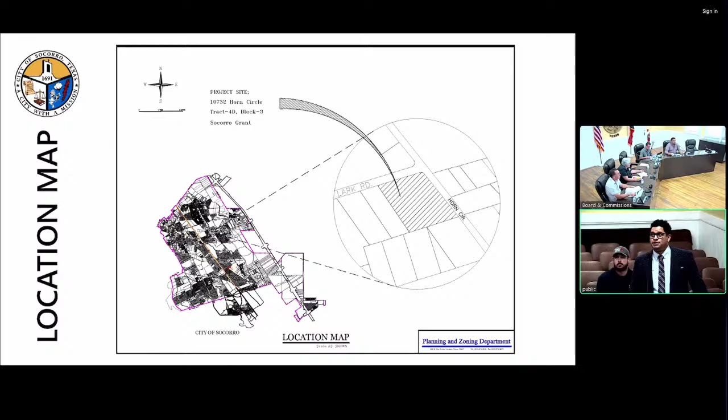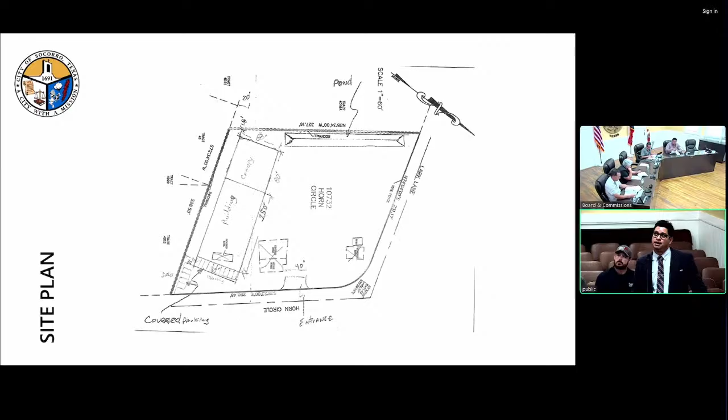Followed by the site plan showing what the intent is, which is to allow the fabrication shop. You can see the parking area and a very preliminary ponding area at the very top. Once again, the request is for approval of a rezoning of a property from R1 to C2 with a conditional use permit to allow for a fabrication shop and a variance request. At this time, staff can answer any questions. We have also Mr. Aranda present to answer any questions as well.

I don't have any questions. I'd like to see this map again.

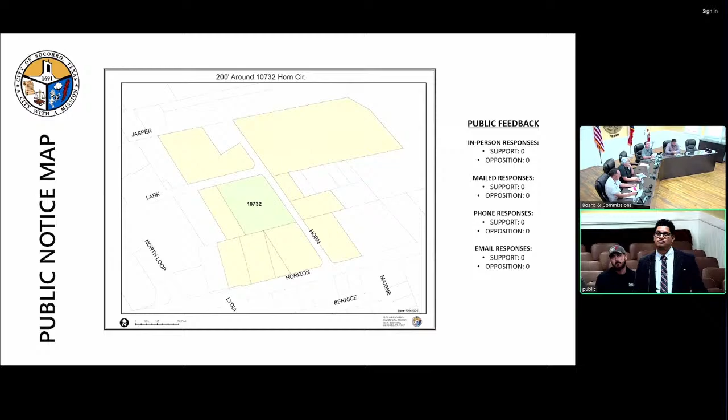I know on that slide you probably can't, but can you see the whole neighborhood of what's in there right now? The whole subdivision? No, this is just that one. You're wanting to zoom out to look at the larger area - these are static maps. We could look at a Google Earth if you wanted, or our planning and zoning map, if you wanted to reference something within the zoning or the larger area.

Yeah, I'd like to see what that subdivision is. It isn't a developing subdivision, it's unplatted, right? It's an unplatted lot. Correct, it's still in tract form - that parcel is unplatted.

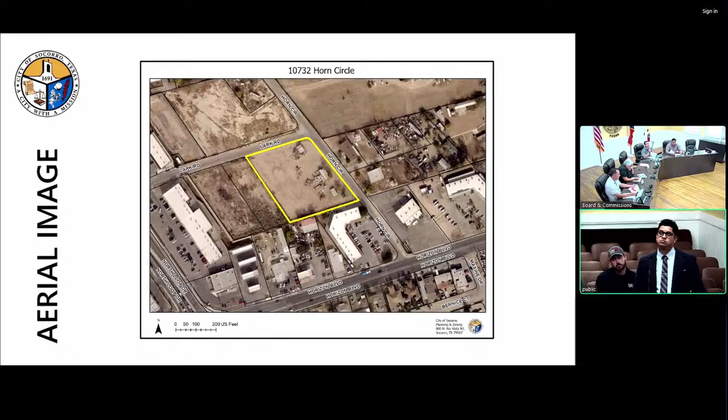But I'm not familiar with the area. I'm wanting to see that whole section aerial and see what's out there. How many single families are out there? Are there any other C2 zoning in this area?

It's because we're seeing just like a cross section of that subdivision, right? And it's like a big corner or a big section of that neighborhood, North Loop and Horizon. Yeah, that's a lot bigger area right there.

So where's the lot at? That's the lot, yes. Weren't there some apartments that came up on Horn? Are those completed already? I believe so, they're close.

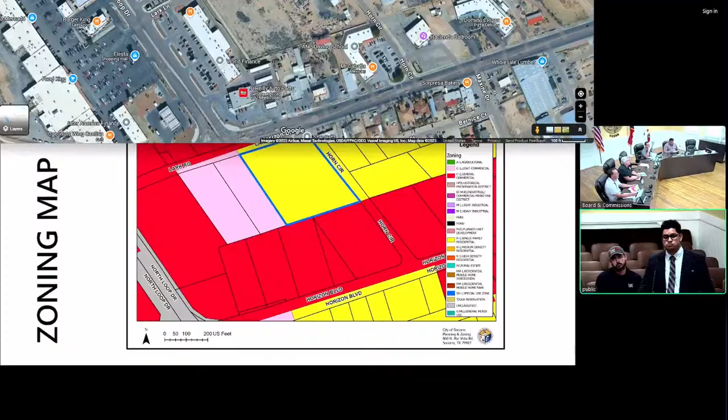And so the future land use map, it says it was rural residential? From what year was that map? 2024 - that is our most recent plan that was approved in July of 2024.

Any questions? I have a question. So it looks like the owner of the property has been operating some kind of commercial business there already. Are we just trying to make it right and go to a commercial zone? Because it does look like he has some kind of commercial business already, is that right? Yes, that's correct. So he has actually been operating as a commercial business for all these years, and I think now he's just trying to make it right? That's correct.

And that was my question - did he get cited on anything? Yes, I believe there was a notice of violation issued for the work on the property, which is currently zoned R1. What is he using it as right now? What is he doing, what is he fabricating? I believe they're fabricating - is the applicant here?

Can you speak to the applicant, please? If you want to pass. If I could just - speak a little louder. Okay, what's the commercial thing? What are we doing now? Can you state your name, sir, please?

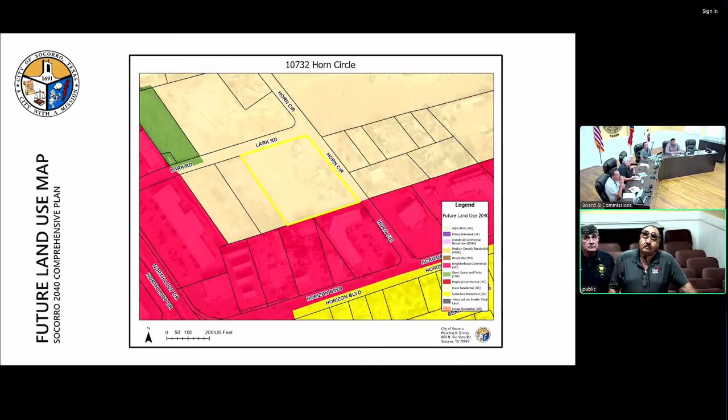And pay the taxes as commercial, because all the red you see, that's commercial. Yes, okay. And so we've been fined, we paid everything in full, we just want to get everything done correctly and enrolled, because we're getting a loan from the bank to tear everything down - like my dad said, tear it down, build new, level it, do the ponding, a new building, fence all around 360 degrees, just do it right so we could continue working, because we're building apartments on East Lake, we just fabricate there and then we go install. We don't sell retail, we don't sell to customers - there's no customers coming in, we just have our set customers that we do work for, so we fabricate and then we just go install.

We fabricate laser cut panels, like decorative panels for apartments, anything metal. Everything will be done inside our future building.

If this gets approved, the bank will release the funds so we can start construction. We make automotive parts too, but everything is done with the CNC plasma indoors. We fabricate and then go install, that's all we do. We don't keep anything, the only material we keep is what we're using for that project.

Are you guys familiar with that area? I've gone by there several times, we take shortcuts through there sometimes. It's a mess right now, everybody shortcuts there, so I think it's good faith for you to come and say you want to bring it up to commercial property. Everything around there is commercial pretty much, they have a tire shop down the street, a yard with 18-wheelers parked, and they're currently selling the 2.5 acres that are going to get rezoned for commercial as well. You've got Gandaras recycling down the street off that close street too, so everything there is pretty much commercial already.

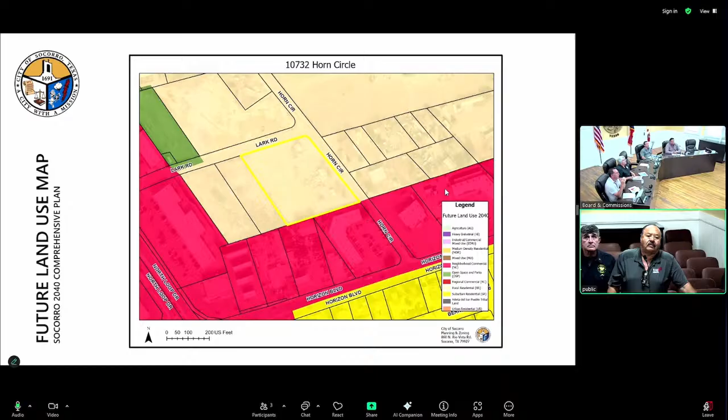Do you have the overlay showing the zoning for that subdivision right now? The zoning areas, all the red is commercial - well, that's the future land use map. The planning and zoning page has the zoning map that will allow you to zoom in and out.

It does look like there are empty properties around your section. Yes, to the right, the one in pink that's commercial, then the one in red across from us that's commercial, and all the way around. The yellow is R1 right now. Actually the one in pink is lighter commercial.

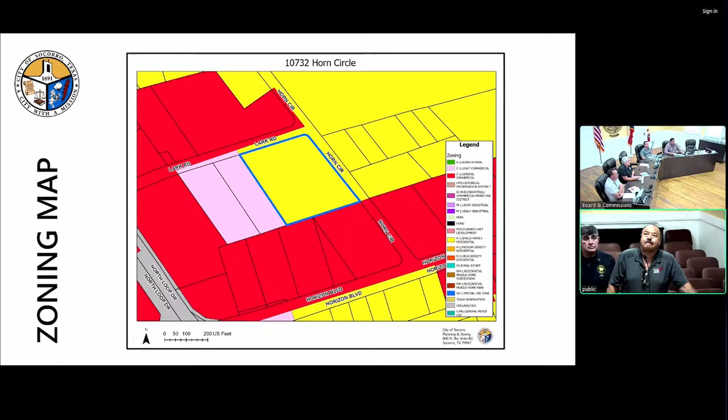So anything that's higher than what we're asking for - we just want to be C2, normal commercial. No, the pink is C1, which is less intense. But across from you on Horn, a little farther down, is an M1, which is more intense than C2.

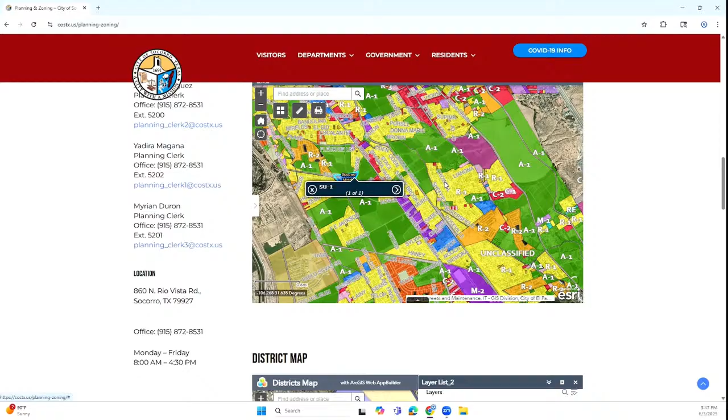Okay, so what I'm seeing - point out Horizon and North Loop for me please, just to make sure. That's Horizon and North Loop. Okay, and so that C2 on the upper left, that's the furthest corner, catty corner the other way, where Horn turns onto Circle, North Loop, on the bottom end - so that whole area is empty.

And I see where the applicant's lot is at, and we've got M2, C2, A1, R2, C - everything in red, which is C2, up along the major highway, the major streets. But everything in there is just, how do you say it, a hodgepodge, you know what I'm saying.

So I'm wondering how many - I know there's still some single families in there, right? I'm just seeing, from our perspective, I personally like the rustic rural feel, because that's what it used to be many years ago, but now we've got all commercial.

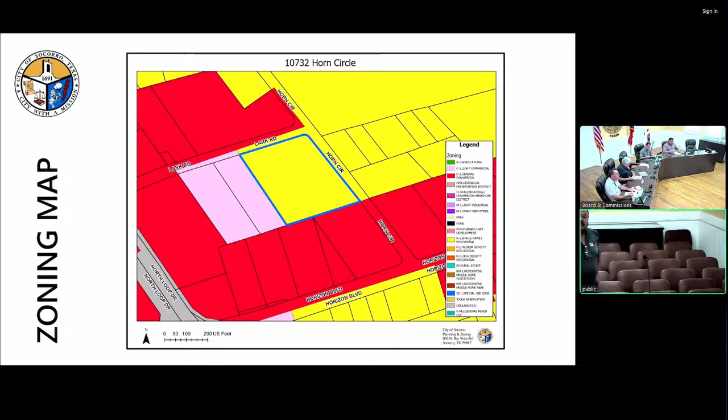Questions? No? So I'd like to make a motion to approve the zoning request with the conditional use permit and the variance request also. I'll second. I have a motion made by Andrew Arroyo, seconded by Osvaldo Reza, to approve. All those in favor of the motion? Aye. Any nays? Any abstain? Motion carried.

Item number 7, public hearing on the proposed amendments to the City of Socorro's master plan and rezoning of Lot 5, Block 8, Mary Lou Park subdivision, located at 636 Maxine Drive, Socorro, Texas, from R1 Single Family Residential to R2 Medium Density Residential to allow for a duplex.

Mr. Arroyos? Good afternoon, we will open the public hearing at 5:52. We have anybody that would like to speak? We don't have any speakers, so we will close at 5:52.

Thank you. Item number 8, consider and take action on the approval of the proposed amendment to the City of Socorro's master plan and rezoning of Lot 5, Block 8, Mary Lou Park subdivision, located at 636 Maxine Drive, Socorro, Texas, from R1 Single Family Residential to R2 Medium Density Residential to allow for a duplex. Mr. Botello? Good evening, Mr. Chair and Commissioners. Item number 8 on the agenda is the rezoning request at 636 Maxine Drive.

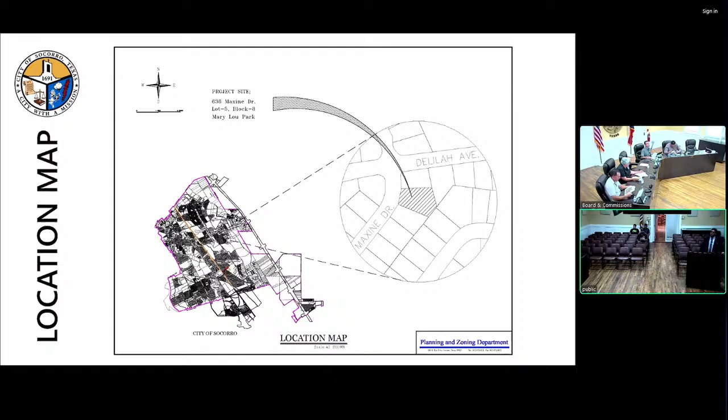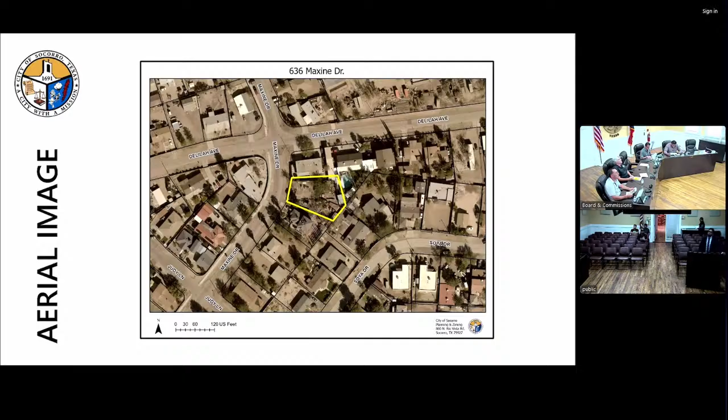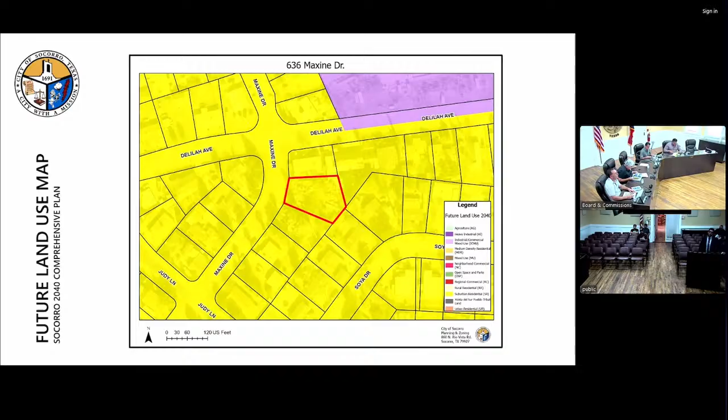This is a future land use map. The yellow overlay would be the suburban residential zoning under the Socorro 2040 Comprehensive Plan.

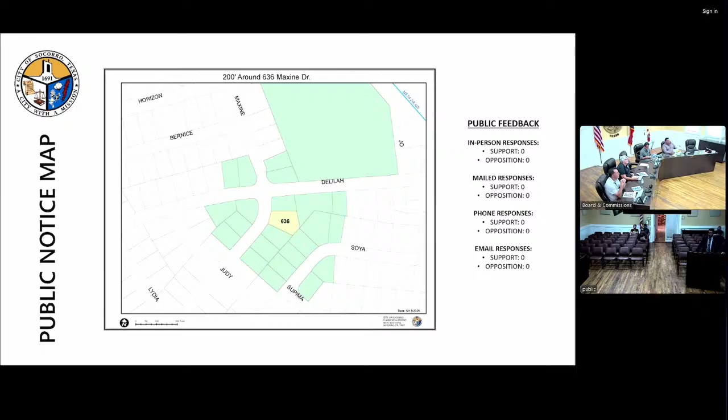The public was notified for this rezoning request, and staff did not receive any correspondence in favor or in opposition for this rezoning request. Followed by the public notice letters, both in English and Spanish.

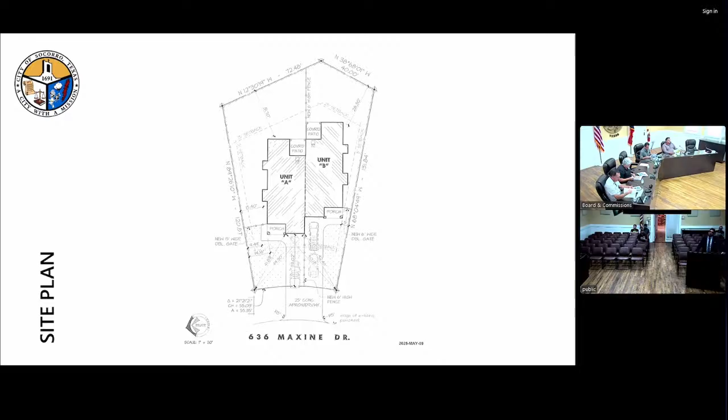This is the site plan that was presented showing the units, followed by a supplemental document showing more or less the square footage and the layout for each unit. Once again, the summary is for approval of the rezoning of a property from R1 to R2 to allow for a duplex. At this time, staff can answer any questions.

So the property next door is already in R2? Yes, ma'am.

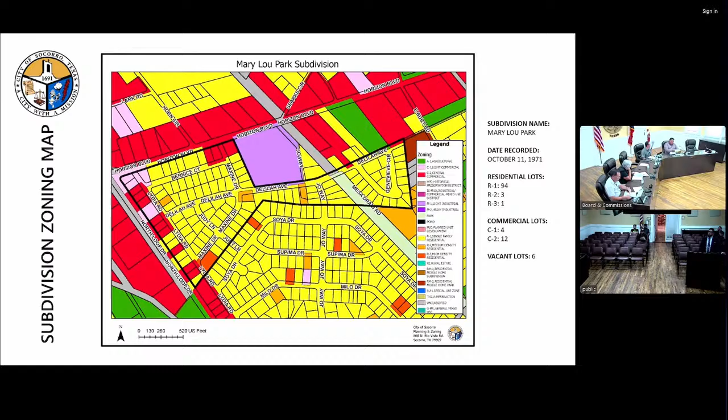I don't have any questions, Mr. Besa. Nobody's opposed to it, right? No. Okay, I'm good, I don't have any questions.

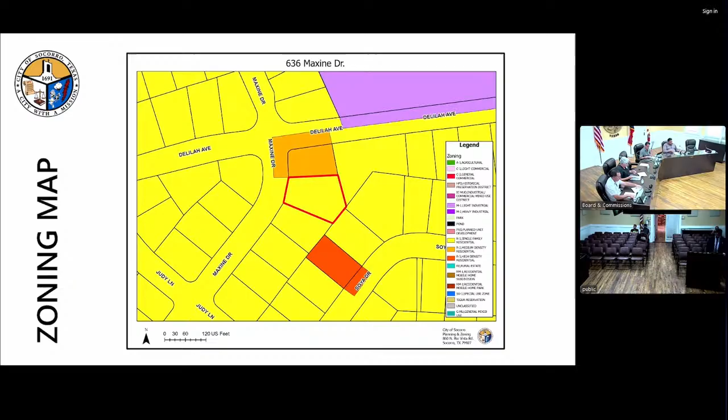I'd like to make a motion to approve. I second. I have a motion made by Andrew Arroyo, second by Yolanda Rodriguez to approve. All those in favor of the motion? Aye. Aye. Any nays? Any abstain?

Motion carried. Item number 9, public hearing on the proposed amendment to the City of Socorro's master plan and rezoning of Tract 10I, Block 3, Socorro Grant, located at the intersection of East Burt Road and Range War Court, Socorro, Texas, from R1 Single Family Residential to R2 Medium Density Residential to allow for the development of single family residential lots on a vacant undeveloped property.

Mr. Arroyos? Good afternoon. We will open public hearing at 5:58. We have no speakers, so we will close public hearing at 5:58.

Thank you. Item number 10, consider and take action on the approval of the proposed amendment to the City of Socorro's master plan and rezoning of Tract 10I, Block 3, Socorro Grant, located at intersection of East Burt Road and Range War Court, Socorro, Texas, from R1 Single Family Residential to R2 Medium Density Residential to allow for the development of single family residential lots on a vacant undeveloped property.

Mr. Botello? Good evening, Mr. Chair and Commissioners. I'd like to tell everybody that I will be abstaining from this item, just because I don't work for that company, but I work with the owners related to that company.

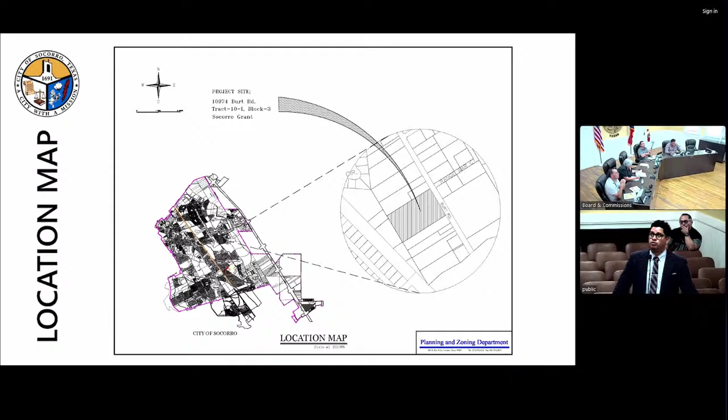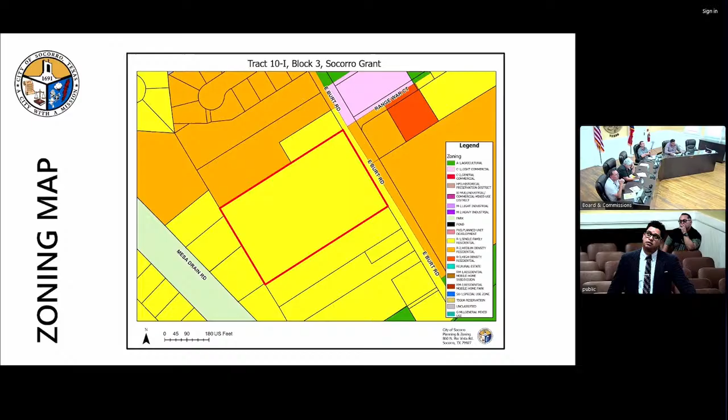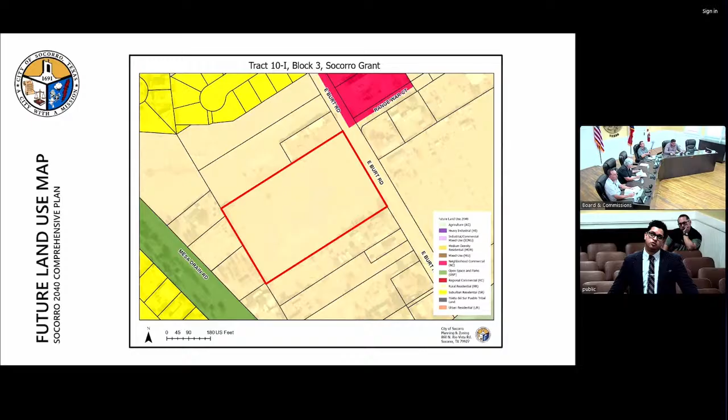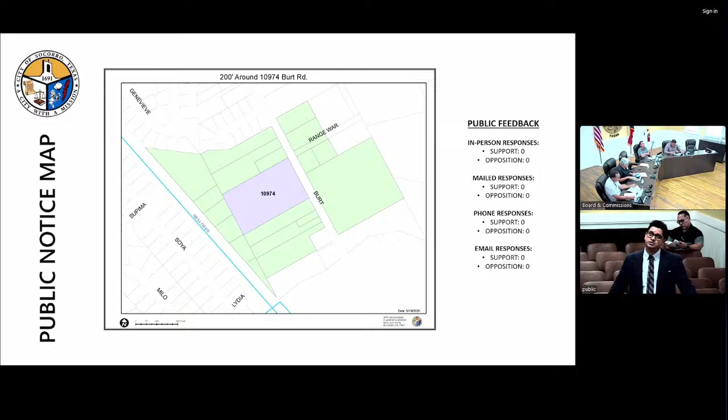Constituents within 200 feet of this property were notified for this rezoning request. We did not receive any correspondence either in opposition or in support of this rezoning request, followed by the letters both in English and Spanish, notifying the constituents for this public hearing.

At this time, staff can answer any questions. We also have Mr. Escarate present to answer any questions as well.

I know we've seen another one on here recently, but what's the width of Burt Road? Like the right of way for Burt Road, more or less? That would be more or less 55 feet.

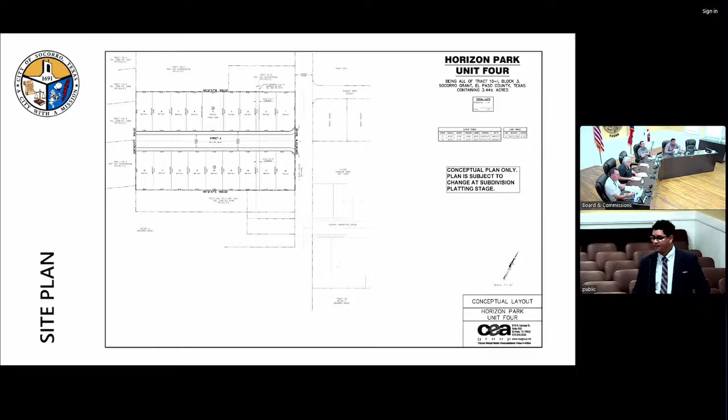The applicant is here, can we ask some questions for the applicant? Good afternoon, Commissioners, Jorge Escarate with CEA Group for the record. Commissioner, to answer your question, we are proposing a 60-foot right-of-way with a 40-foot paved roadway from curb to curb, so it's in line with the City of Socorro standards.

We had looked at another subdivision earlier, and the next item is 5 acres across it, right? So all of those will be connected to Burt Road? Correct. They're not connected to any other subdivisions or anything like that? Correct, this is all through Burt Road. The other one across it does have a connection to Horizon Park Unit 1, Replat A, for the apartments, that also provides access through Francisco Vaquera to Horizon Boulevard as well.

And all services, like utilities, are they already on Burt Road? I imagine so, there's utilities on Burt Road, and actually, as part of this development, we're going to be extending water and sewer to some of our neighbors abutting it. Right now they are currently landlocked, the property to the west of us, landlocked and have no services. Now we're going to bring up a paved roadway that they're going to have access to, so they can come in and out of their property, and we're going to extend service to the property line, water and sewer, and then just end it there, and then they can go ahead and extend it if they need to.

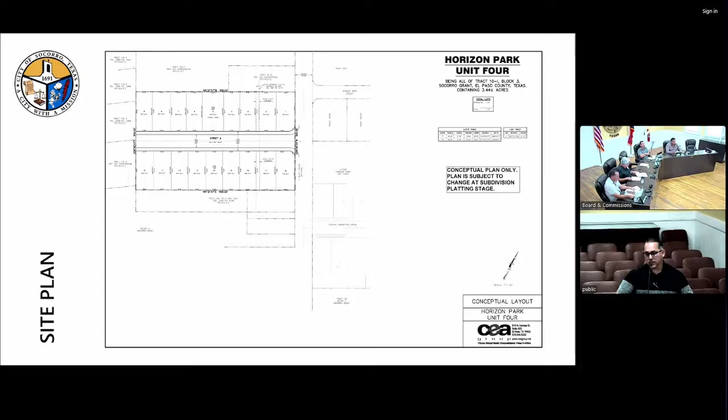I don't have any questions. Make a motion to approve. I'll second. I have a motion made by David Estrada, seconded by Osvaldo Reza, to approve. All those in favor of the motion? Aye. Any nays? Anyone abstain? Abstain. Motion carried. Thank you.

Item number 11, Planning and Zoning Commissioners Report. Isn't there another item missing? There's item number 11. I'm so sorry, I do apologize about that.

Consider and take action on the approval of the proposed final plat for Horizon Park Unit 3 subdivision, being tract 10-J, Block 3, Socorro Grant, located at 10971 East Burt Road, Socorro, Texas. Mr. Botello, again, I'd just like to advise everybody that I'm going to be abstaining from this one as well, for the same reasons.

Good evening, Commissioners. Item number 11 on the agenda is the Horizon Park Unit 3 final plat. Some general information on this request: the property owner is Bowling Brothers Development Company LLC, and the representative is Mr. Enrique Escobar. The size of the property is 5.165 acres, currently zoned R2, medium-density residential, with current land use being residential and agricultural. The summary is for approval of a final plat for Horizon Park Unit 3 subdivision, and staff is recommending approval.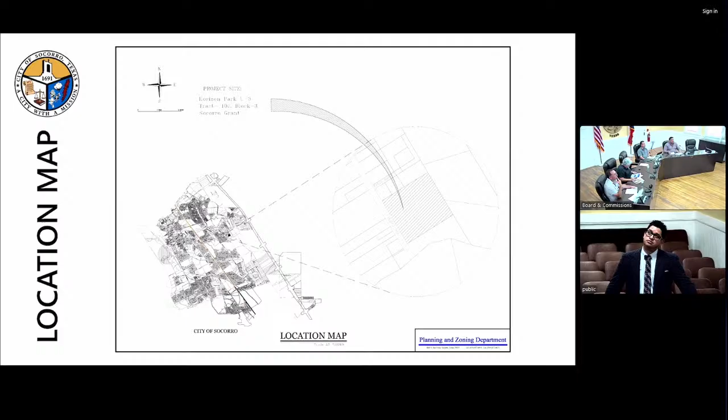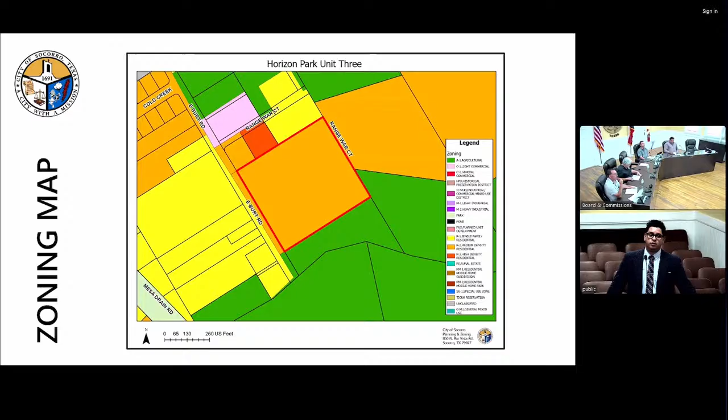On the next slide, you'll see that the property is situated along Burt Road, within close vicinity to Horizon Boulevard. The following slide shows the property outlined in a thick red line, with orange denoting the R2 medium density residential zoning district. This is a view of the property from East Burt Road, followed by an aerial image, and then the final plat showing the connection through Sophia Arroyo's Drive, connecting this subdivision to Horizon Park Unit 1 Replat A.

Once again, the summary of this request is for approval of a final plat for Horizon Park Unit 3 subdivision. At this time, staff can answer any questions. We also have Mr. Azcarate present to answer any questions as well.

I have a question about the streets. So how many lots are on this subdivision? It's similar in size, about the same, right? Yes sir. It's hard to see, 17. 17 on this one and 18 on the other one. Yes sir, correct, 17 - one of them is a pond on the other one. Yeah, they look almost the same.

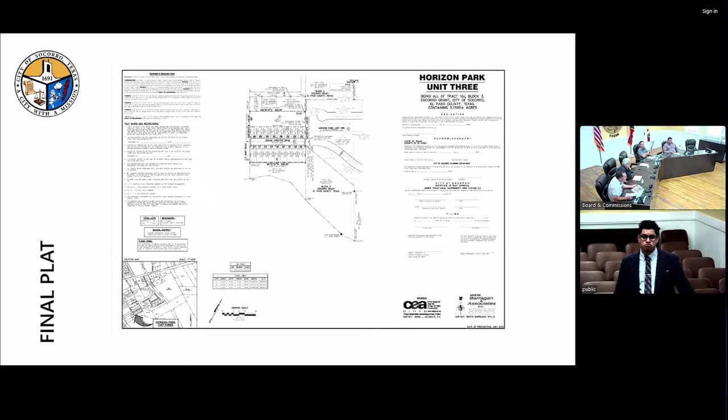Motion to approve. I'll second. I have a motion made by David Estrada, seconded by Osvaldo Reza, to approve. All those in favor of the motion? Aye. Any nays? Any abstain? Abstain.

Motion carried. Item number 12, Planning and Zoning Commissioners Report.

I don't have anything. Teresa? Estrada? Aye. It feels good to be back for a while, work just got into me.

The only other thing I will say, throughout the city - great job on that Bovee Bridge. But if we can request the speed humps to be painted. I mentioned it a couple months back, in all subdivisions, because in Haciendas del Valle they're not painted. What's that other one, Villas del Este, and the Bovee one. I say it because of the school, since we have Socorro Elementary there. I know they put the speed radars, but at night people jump those speed humps. So in those two areas, if we can get them painted, that'd be great, because you can't see them. They just put a new sign in front of the school and it's already knocked down when you try to go around it, so that would be great, please.

I would like a high-tech sign that shuts your engine off if you're going past 40 miles an hour, just going down Horizon. It is horrible, it is bad. I know there's a lot of good stuff going on with the city, a lot of improvements. I think we're trying to keep up with the other side of the I-10, but we're almost there, I think. We just need a lot more entertainment instead of a lot of warehouses, and I think you see it all over the place.

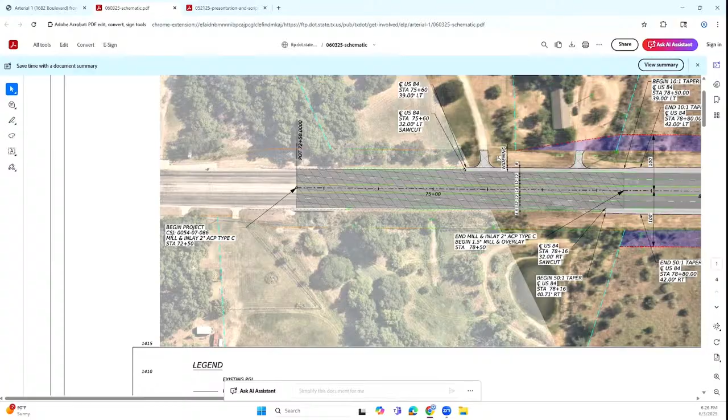But we are at this point now, and still in the public comment period. All of the information that anybody can provide, in favor of or against, is encouraged. If anybody has questions, you can direct them to our office and they can speak to me. And the extension of that comment period is so that the residents can go in and comment.

Yes. What benefit does it do to them? That they're gonna get heard? Yes, is that gonna change course, the route? That they can get heard, that they can present their information, that they can present information that maybe staff or the consultants are not aware of. All of this gets taken into consideration.

Unfortunately, we are in a very tough position. If we want to build roads, if we want to extend our networks and provide connectivity and make it easier to navigate our vehicles in and around Socorro, we're going to have to build roads. And there's nowhere really in Socorro where you're not going to impact somebody either directly or indirectly.

It would be great if you could anticipate and have the resources to make these decisions, to put the roads in before the development. But these larger projects, cities, municipalities don't have those types of resources.

But we are trying to address these issues as best we can moving forward. There are things that can be done to help mitigate the negative aspects of any project, and those can be looked at as well. But yes, it's important for everyone to voice their opinion, to have their opinion noted. And the earlier in the process, the better.

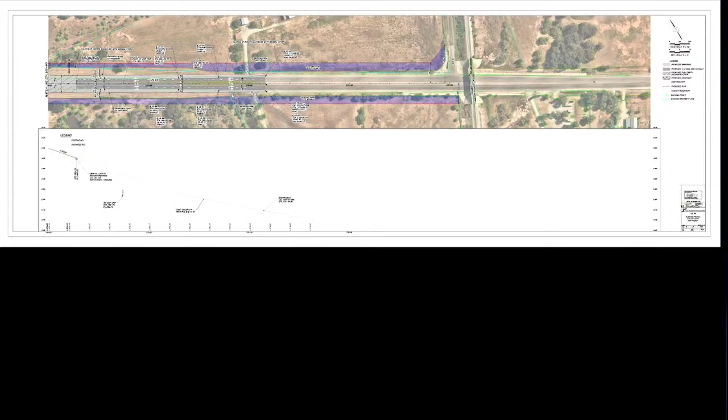I lost my train of thought. What was your question again? The other one was, they're saying they're gonna buy our land, eminent domain, right? So in this whole long process, it's narrowing it down to where are we putting this road, is this environmentally cleared to design it. This is going to be the route, these are the impacts, this is how we can mitigate the negative impacts, and this is where we're going to move forward.

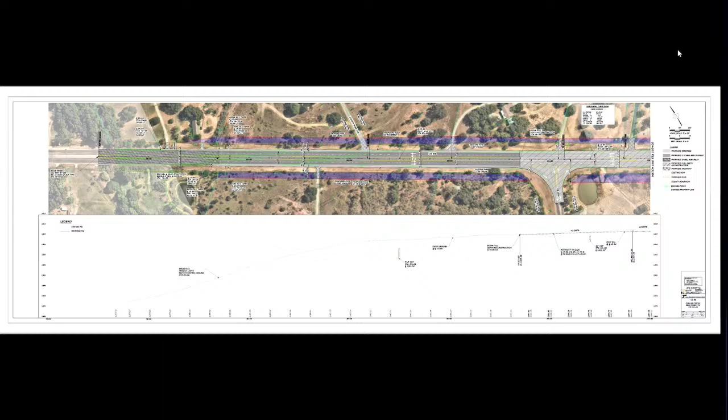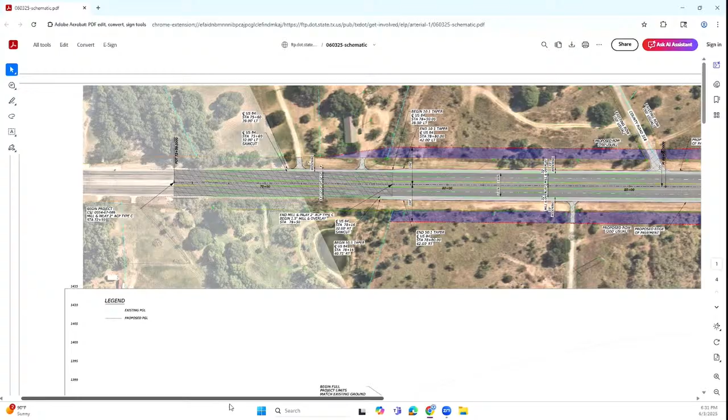Now, the next phase is the actual schematics and drawings and designs, clearing the environmental, and then going into the next step of right-of-way acquisition. If there are properties that are impacted, what level of impact are we talking about -- hey, we need 10 feet of your front property, or we're going to take more than a certain amount? Then negotiations happen, whether it's 10 feet or a whole property. That's the next step of negotiating. And because this is federal funding, we have a process that we need to follow, a uniform act, overseen by TxDOT, so that everything is fair and equitable.

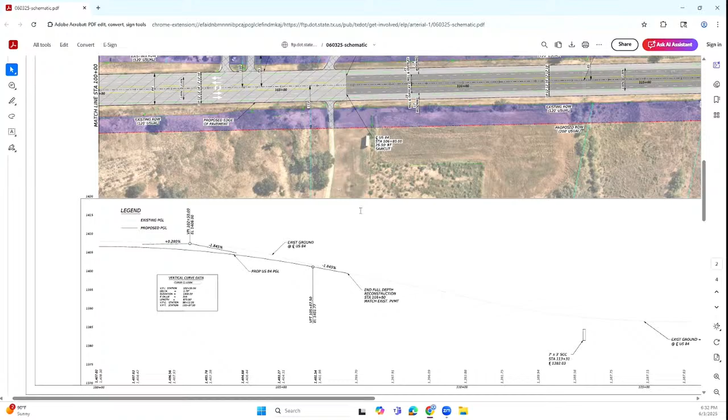And so where is it supposed to come out on the other side of Alameda? You have to cross at one end and then make our way through. Do you want to start, go to the far right on this?

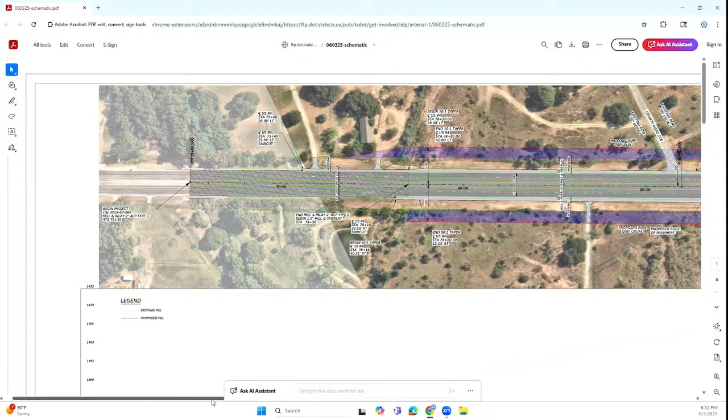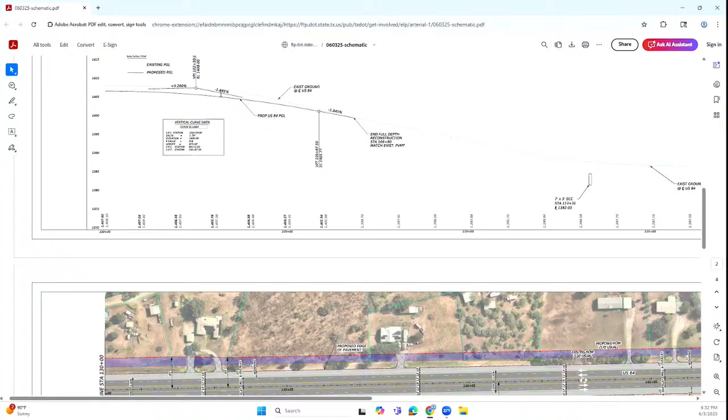It doesn't look like that's the right road. Yeah, I think they have the wrong map up, doesn't look familiar at all. Okay, we'll reach out to TxDOT to fix that. It says US 84 -- no, wait, what does it say?

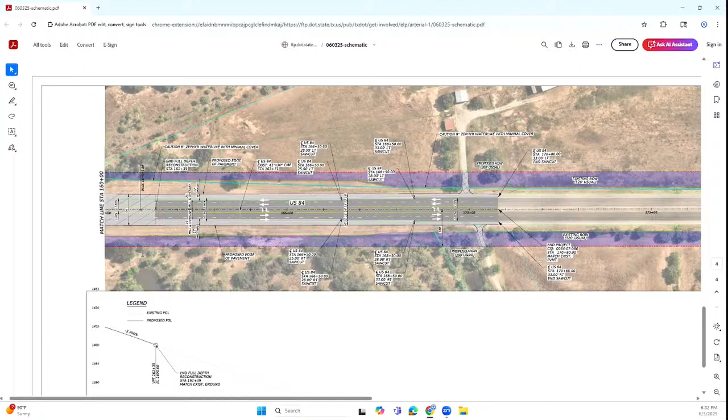I have another question. About a month ago, or maybe more, we had an applicant here that was going to -- the road on Bauman was gonna go up to I-10. It was a rezoning on North Loop, to commercial from A1. And this rezoning was their first phase, and they own pretty much all of the land going up between North Loop and I-10 and the city limits. There's a stretch that's outside of their ownership and extends out to the county. So that is that individual developer's plan for that. It does not involve federal funding or state funding. It's an alignment that somebody is trying to make for that development.

But ultimately, they would like to be able to provide that commercial development on North Loop, build their residential development, and have access up to the gateway. But that's privately owned, not federally funded.

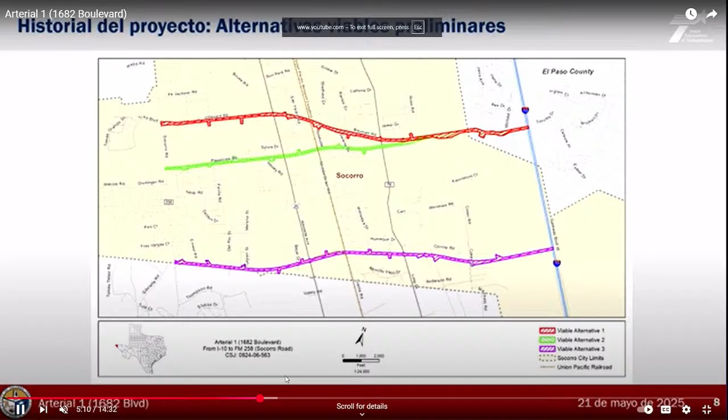I was going to add this since you had a question on condemnation. I've done it twice with the city, on Nueva Tanks Road and maybe Fray Alguin Road. It depends on who owns the road. Once you start doing the title paperwork, sometimes the owner only owns a little piece of the road, or sometimes it's been open to the public so long that the city actually owns it, even though there's nothing on title.

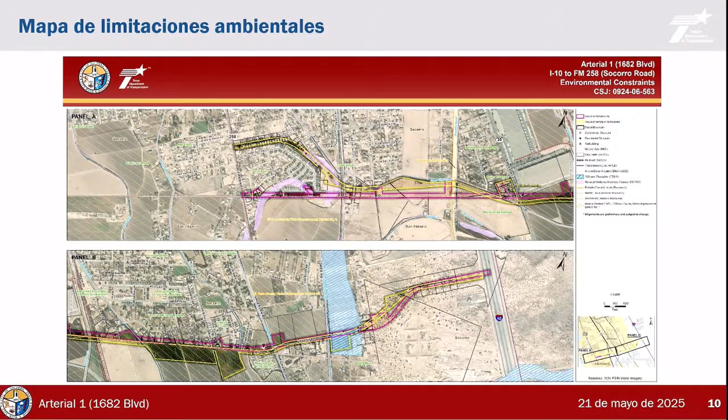So if they need portions of the road, you have to negotiate with each owner. On Nueva Tanks Road, that process took about 2 to 3 years, because everything had to go through TxDOT forms. We'd run it by TxDOT, get their approval, then send out offers. Most everybody negotiated, some just gave the land, but they all wanted something in exchange.

One guy wanted a traffic light agreement, another wanted a curb cut in the middle of the road so people could turn. Every single person we had to negotiate with. Then you don't just need the road, but easements on both sides for utilities, so people were negotiating that too, and we had to send multiple offers for the land and the easements.

On that one, the electric lines used to be on the other side of the road, so we had to work with the electric company to move all the poles and put in newer metal ones. There was a lot of give and take, and it depends on whether people will be easy or not.

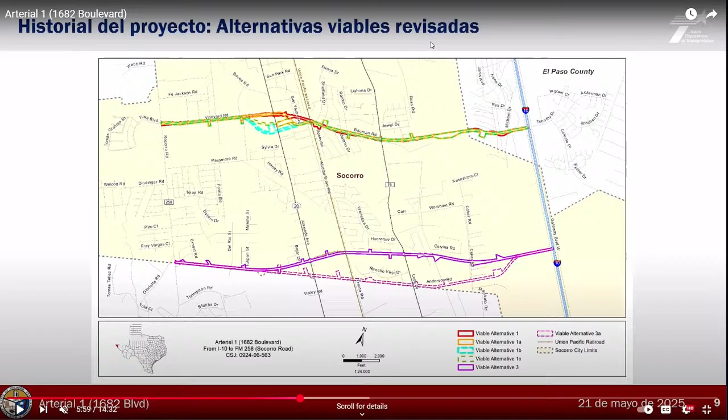A lot of times residents say, oh yeah, we want the road and this access, but once you start condemning their property they say hold on, not mine though, or I want top dollar, or I'll take the city to court and we'll fight it out for months. It depends on those people. Ultimately the city has a right through eminent domain to use roads and create rights of way, but it depends on how many owners you're dealing with—that one had maybe 13 or 14 owners.

EPCC was one of the people we were dealing with, along with the Lower Valley Water District. Then there are crossings you have to deal with, doing a lease agreement. That whole process took 3 years out of the 10 it actually took.

On the Arterial 1 project, I remember going to a meeting, maybe in 2019, with TxDOT and Adriana Rodarte. It was the very first meeting, so it's been 5 to 6 years, well before COVID.

I took a ride out there yesterday since I wasn't familiar with the area, because of all the Facebook stuff—friends were calling asking what's going on. It kind of blindsided me since I didn't know anything about it, but I did take a ride out there, and there's a lot of vacant land.

I don't believe they're going to take a straight cut right through, because there are some really nice ranch homes out there. The roads are bad—it looks like they're putting in sewer lines, and there's a lot of road work in some areas, but the pavement on those streets is terrible. You don't have two ways to go. I also noticed a warehouse way up at the very top edge.

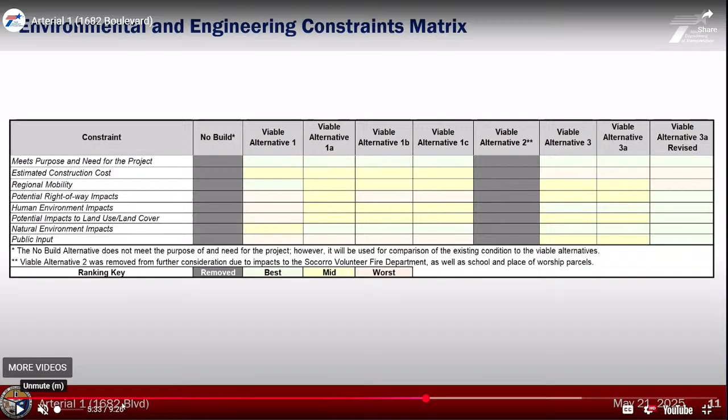Okay, that's clear. So we're kind of confused, have we taken into account all that future traffic, is it going to hit Socorro Road, and it's one lane going and coming? But it's going to go out onto the freeway, the new Loop. A lot of the traffic from Socorro Road will head up to I-10, so some of that traffic that would go through Socorro Road will divert right and go up toward the freeway. So it should slow down.

Mind you, they'll get to the interstate and have to go down and around if they're going east, but if you're going west they can. But if you're coming down the arterial and going down to Socorro Road, all the traffic from I-10 is not going to hit and buckle up at Socorro Road if they're going either right or left, because you only have one lane going and coming.

So are there future plans to extend that road, Socorro Road? I don't see that, because of the historic nature of the corridor, the Mission Trail. It's going to come out right here, this vacant lot.

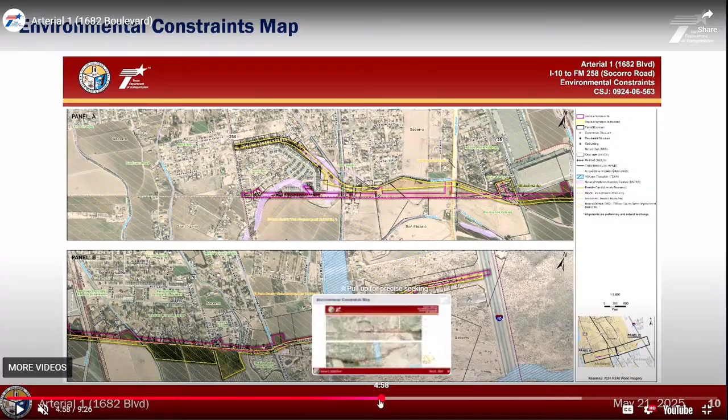It was three initially. The first two, alternative 1 and 2, started at the same point on I-10, made it through to North Loop, and then diverged there. The third was a southern route that was straight across, more or less, from that point on the interstate to Socorro Road. After revisiting this, I want to say that was the April meeting, there were about three other alternatives looked at for that southern portion, and that eliminated the initial second option.

So I think that was about variations of the three options. And so now they're looking at this, which is called arterial 1. This is still arterial 1.

The lead is Socorro, in partnership and in conjunction with, managing it with TxDOT. And there's a consulting company involved, or is TxDOT running all the consulting? No, the city is the lead.

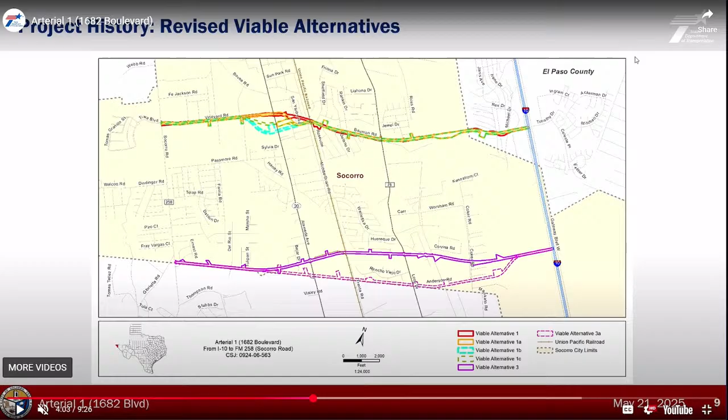We went through the process of bidding for our engineers and who would be the engineering lead on our project. So they also have under them a team of people who are assisting with the outreach and gathering all of the data, putting together the documents. So CEA Engineering is the firm that oversees, along with us, this project.

At the leading, the City of Socorro is the lead agency, and then we're just coordinating with our partners. There are some aspects that need to be coordinated through the El Paso Metropolitan Planning Organization, because they allocate funding in the region as the transportation planning agency. And then there's TxDOT, because the money gets funneled through TxDOT from the federal government, from FHWA, from TxDOT funds that the Texas Transportation Agency has for projects like these, and together making this work.

So there are 3 or 4 different entities involved - TxDOT, City of Socorro, a consulting firm, an engineer, and this last one you mentioned. So who ultimately makes the decision and says, we're going here, not here?

The process. The NEPA process is what we have to follow in order to make our determination. It's not a vote of any one body or person, no decision by any one person. It's this whole process of gathering information, meeting with the public, taking that into consideration, looking at all of the environmental and cultural impacts, and the costs, which are not as big as other items in the array of what we have to use to evaluate the best route, the least impactful route. That process is what we use to determine the route.